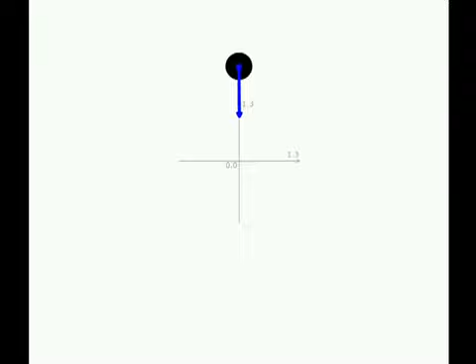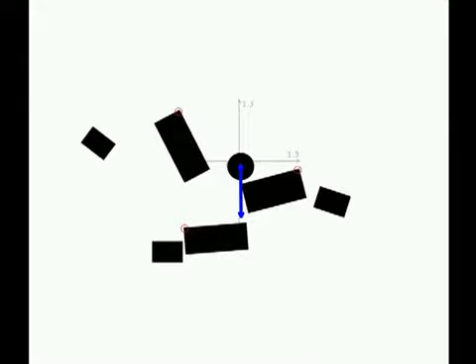Anything at an elevated height has gravitational potential energy. If it falls and none of the energy is used for other things along the way, all of that energy is converted into kinetic energy, the energy of motion, and we call it free fall. If any of the energy is used for other purposes, there will be less kinetic energy, so the fall will be slower.

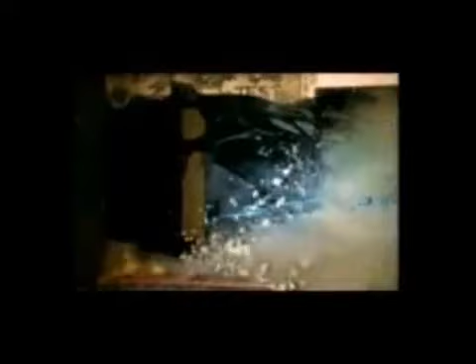In the case of a falling building, the only way it can go into free fall is if an external force removes the supporting structure. None of the gravitational potential energy of the building is available for this purpose, or it would slow the fall of the building. The fact of free fall by itself is strong evidence of explosive demolition, but the evidence is even stronger than that.

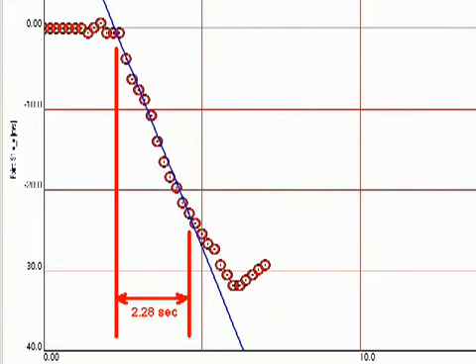My original analysis looks like this. I have since confirmed my measurement using a different software package. Both of these graphs plot velocity versus time. A straight line indicates constant acceleration, and the slope of the line indicates the rate of acceleration. What is particularly striking is the suddenness of onset of freefall. The acceleration doesn't build up gradually. The graph simply turns a corner. The building went from full support to zero support instantly.

What is totally misleading are the gradual transitions into and out of free fall. The raw data speaks for itself. One moment the building is holding, the next moment it lets go and is in complete free fall. The onset of free fall was not only sudden, it extended across the whole width of the building. My measurement of the acceleration of the building was based on the northwest corner. This recent measurement confirming free fall was based on a point midway along the roofline. The fact that the roof stayed level shows the building was in free fall across the entire width.

The collapse we see cannot be due to a column failure or a few column failures or a sequence of column failures. All 24 interior columns and 58 perimeter columns had to have been removed over the span of 8 floors low in the building simultaneously to within a small fraction of a second, and in such a way that the top half of the building remains intact and uncrumpled.

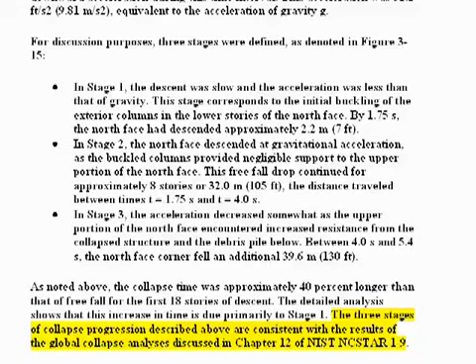Let's come back to NIST's acceptance of freefall. Here is their exact wording. Quote, "The 3 stages of collapse progression described above are consistent with the results of the global collapse analysis discussed in Chapter 12 of NIST NCSTAR 1-9." Unquote. In other words, they're giving the appearance of claiming freefall is okay, but actually it's the 5.4 second duration of their 3-stage analysis that matches their model.

But we saw in Part 2 of this video series that the 5.4 seconds depends on an artificially early start time, which has no valid observational basis. Without the 5.4 second fig leaf, they are left with free fall and nothing more. NIST does not show how free fall is consistent with their hypothesis, because, as Shyam Sunder has correctly and eloquently explained, free fall for a naturally collapsing building is impossible.

This brings us to their computer model. NIST's so-called investigation actually consists of finding a way to reproduce the mysterious collapse of the building using a computer model.

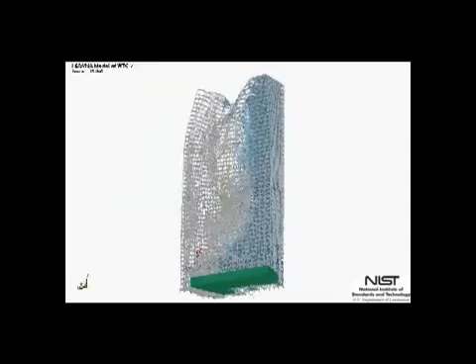The assumption is that if the computer model can be made to reproduce the observed collapse pattern, that must be how it happened. The problem is, if something unexpected was going on, like explosives for instance, you're not going to discover it in the computer model. For that, you need to look at the actual evidence.

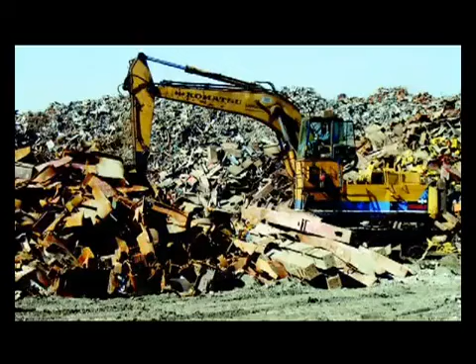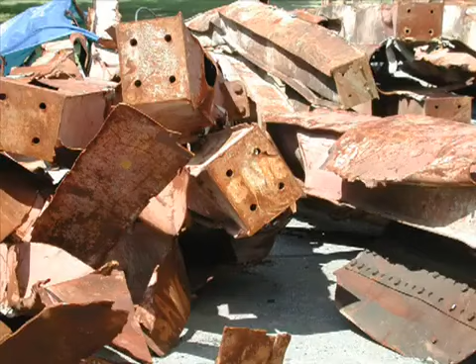So why not examine the steel directly? Oh yes, there isn't any. At least there isn't any after it was hauled away to Asia and melted down. NIST's investigation has been compared to conducting an autopsy without the corpse. As of 2005, NIST reported having only 236 pieces of steel from the World Trade Center complex, none of them unambiguously identified as being from World Trade Center 7.

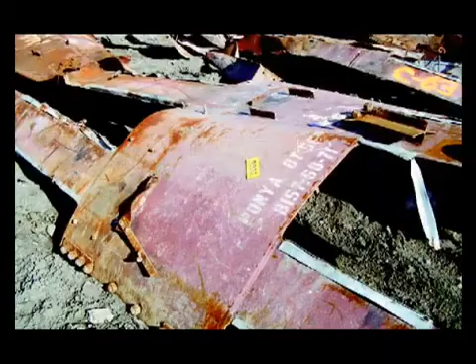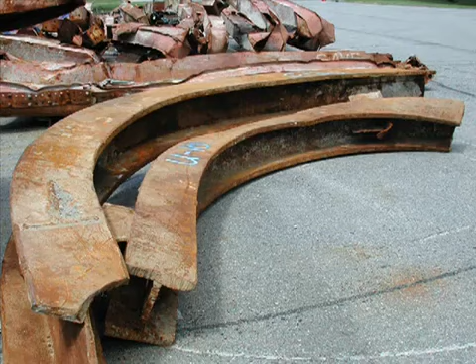We've all watched CSI. Anyone serious about solving a crime knows the importance of physical evidence. Yet here the crime scene was scrubbed, the evidence was destroyed, and the investigation was delayed for years. Destroying a crime scene is itself a criminal act. Destroying the steel has absolutely no justification except to cover up the cause of the collapse.

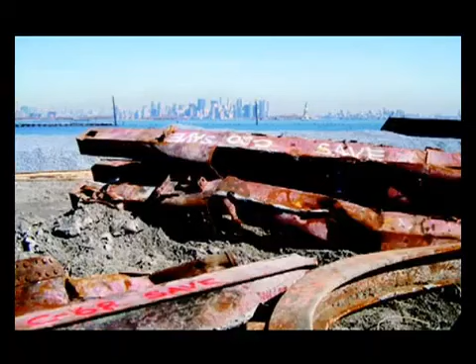So even if we knew nothing else about the events of that day, we can see immediately there was a cover-up. Knowing there was a cover-up is a strong indication there was a crime someone wanted covered up. Any investigation that does not acknowledge this basic fact is not really an investigation. It's an extension of the cover-up.

NIST claims their computer model can account for the observed phenomena. So let's look at NIST's model. Except we can't. The software they use to do the modeling is available, but their model actually consists of all the numbers and measurements and assumptions together with any tweaks to the system they might have used to get it to come out the way they wanted.

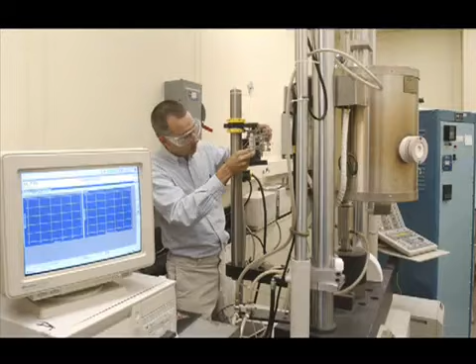If that information were released, their results could be checked by anyone with the appropriate skills and software tools. But NIST has not released the numbers. All we've been shown are some of the selected animated outputs they were able to get their model to produce. Is their model realistic? We don't know.

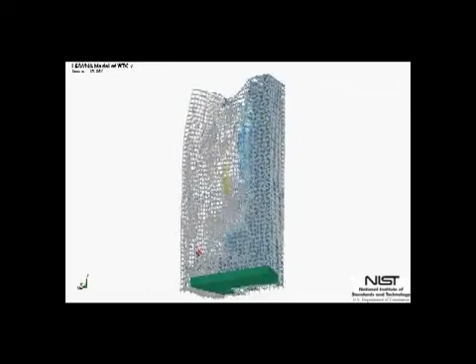Some models are chaotic in the mathematical sense. In other words, tiny variations in the inputs might result in wildly different outcomes. Is NIST's model stable or chaotic? Realistic or contrived? Honest or fraudulent? We don't know. We can't know without independent testing.

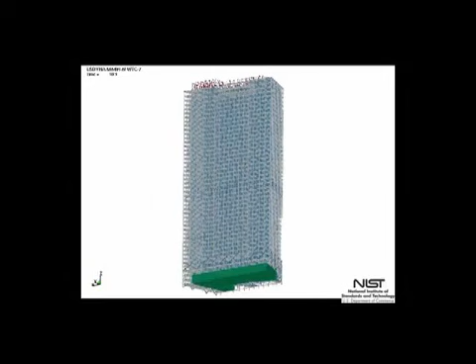The very process of running the model until it produces the kind of result you're looking for is called selection bias. If you think about it, NIST's methodology is explicitly based on selection bias. Even if you could show what might have happened, it doesn't show what actually did happen. The very fact that NIST has not released their model strongly suggests they don't want their results checked. In other words, their results are intended to be taken strictly on faith.

If NIST has not released their modeling data and their assumptions, they have really not released their report. And the fact that this is their final report indicates they do not intend to do so. Therefore, on the face of it, their report is little more than a fancy, expensive cover-up.

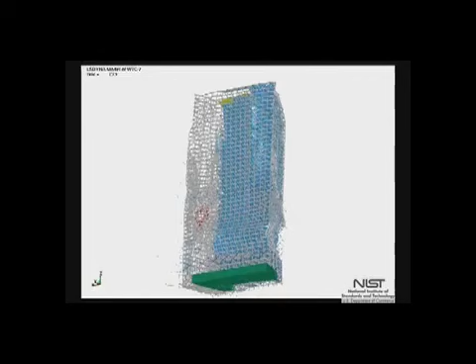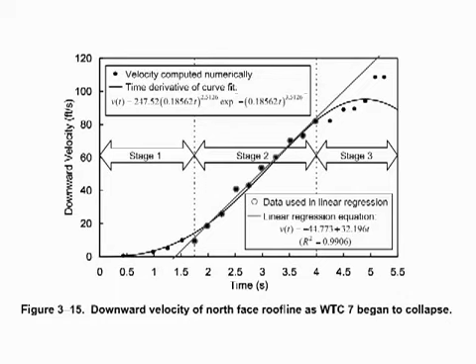One fact we do know about NIST's model is it does not allow for freefall. The best they could do is 5.4 seconds for the building to crumple down through 18 floors. Crumpling absorbs energy, and that makes freefall impossible. There's nothing in the models we have been shown that even resembles a three-stage collapse with a freefall component.

After all, as Shyam Sunder put it himself, freefall happens only when there are no structural components below the falling section of the building. Any natural scenario is going to involve a progression of failures, and these don't happen instantaneously. So, in the end, we come back to where we were in the beginning. On first impression, we were looking at a classic controlled demolition.

NIST claimed to have found a way it could have happened naturally, but in fact they failed. The only way they can support their claim is through lies, secrecy, and pompous but false pronouncements. That constitutes a failed agenda. Explosive demolition is the only scenario that has been put forward that could actually account for the observations. Where does that leave us?

We have a building that underwent directly observable and now officially acknowledged freefall, with no plausible mechanisms other than explosive demolition. We have an official investigation by a government agency that has fraudulently manipulated data, has refused to even consider existing physical evidence that explosives were used.

They have wrapped themselves and their data in secrecy and offered up pronouncements as conclusions to be taken on faith. The NIST investigation is a fraud and a farce. We need a new, fully empowered, truly independent, and open investigation.